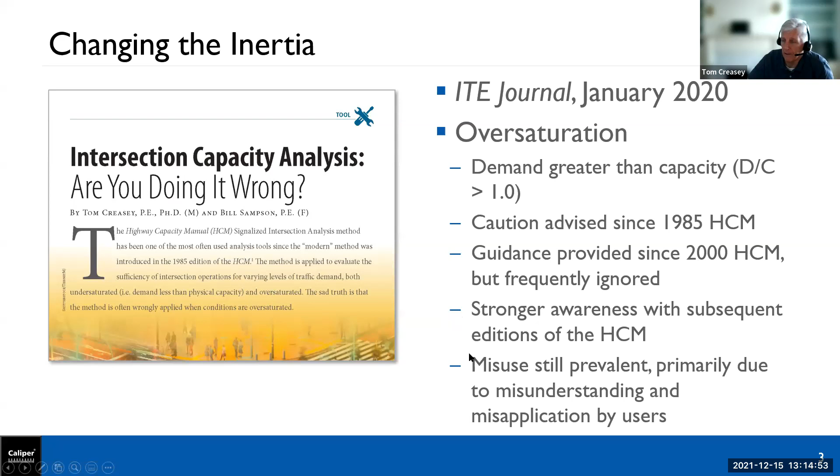And it's primarily due to misunderstanding by the users and/or misapplication of the methods, and simply just using software and not really understanding what the software does or does not do. So this is the article. You can actually look it up. It's the January 2020 edition of the ITE Journal.

So this group, dealing with simulation particularly, this entire slide should be familiar to you, but just quickly, the deterministic methods are not subject to randomness. This is what's in the HCM. They're macroscopic, so they deal with flow rate, that is vehicles per hour. No matter how many times you do the analysis, the same inputs are going to give you the same output. And two of the most prevalent, not the only two, but certainly Highway Capacity Software, HCS, and Synchro are the most commonly used tools. There are some others.

Stochastic is, these random variables are incorporated to represent attributes that we don't know with certainty. They behave within predicted ranges. And these are microscopic in that we model individual drivers that are following these rules of the road that just so happen to be defined by mathematical models. Rules for car following, lane changing, gap acceptance, those types of situations.

So therefore, we use random number sequences and perform multiple runs because, and we've all done this in collecting data, we may collect data during a typical day for several days in a row, and yet we're going to get different results every day.

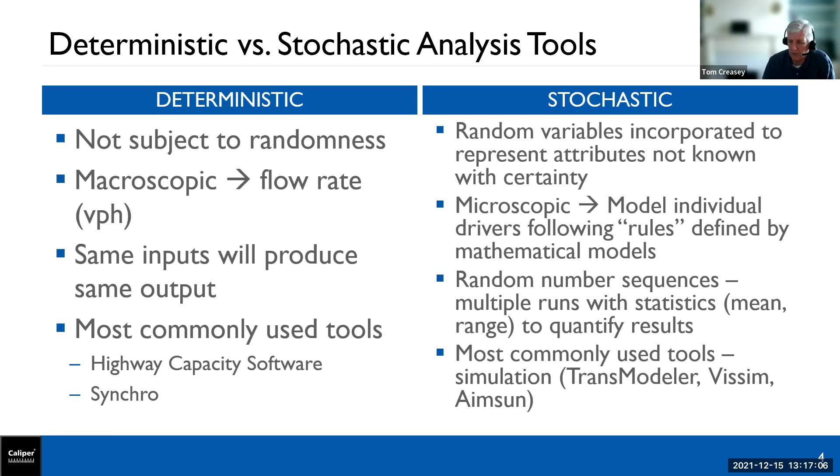There are a number of simulation tools that are out there. The most commonly used, I get to list TransModeler first because I work for Caliper, and that's our simulator. Vissim and Aimsun are also, as you all know, used quite frequently. There's some others. CORSIM is still around. There's SUMO, which is open source. Paramics was an early one back from the 1990s. Don't see it as much anymore, but there are a number of commonly used tools that do microsimulation.

Looking at the deterministic tools and the deterministic approach that was in the Highway Capacity Manual, most of the procedures in the HCM are based on a peak 15-minute rate of flow, which is then converted to an equivalent hourly flow rate using the peak hour factor. You can see the formula for that on the right-hand side.

A lot of people over the years have just not understood, though, that an HCM analysis is really analysis of the heaviest or the worst 15 minutes during the peak hour, the peak within the peak. And that's what the peak hour factor is for, to take that worst 15 minutes and equate it as if it were an hourly flow rate. So a peak hour factor range is somewhere between 0.25 and 1.0. You can do the math if you'd like, but the lower a peak hour factor is, the more peaked within the peak the traffic conditions are.

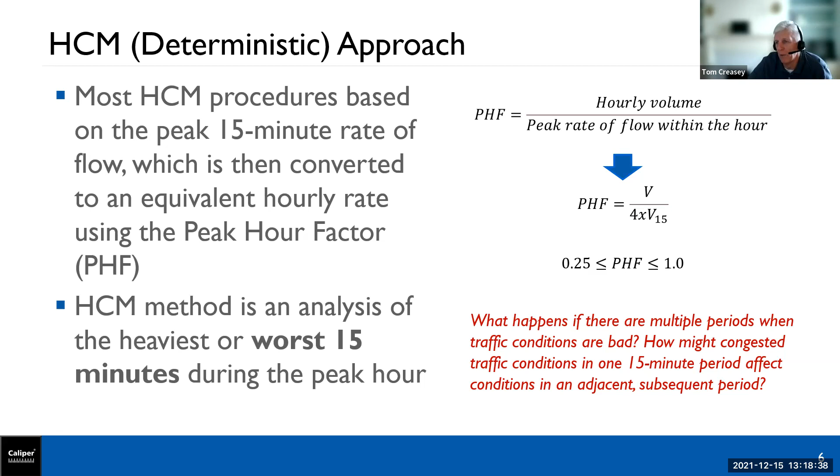But what happens if we have multiple periods when traffic conditions are bad? Maybe they're not all 4 periods within the peak hour, maybe there are 2 or 3. And how might congested traffic conditions in one 15-minute period affect the conditions in the next subsequent period, particularly when we're dealing with oversaturation? This is directly out of the HCM, and it discusses the three different approaches to looking at a single period of analysis versus multiple periods.

The one on the left, approach A, is really the default approach that the HCM takes, looking at the worst 15 minutes. And so this histogram is an hour divided into 4 15-minute periods. And we focus really on the worst of those. But because all of the volumes are in an hourly flow rate, we use the peak hour factor to basically make the entire hour the line even with the top of this one bar here.

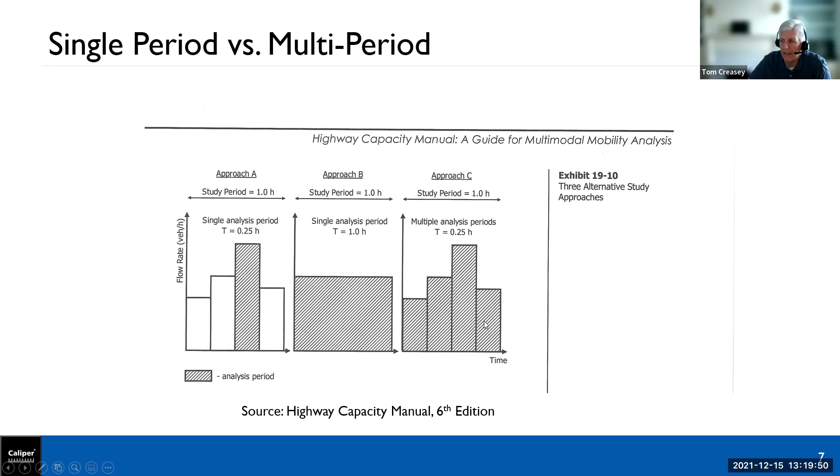When we look at a single analysis period, there's an implicit assumption that the traffic demand does not vary, that it stays constant over that entire hour, which unless we have really heavy traffic flow, we know is not the case. And then the third approach discussed in the HCM is to evaluate each one of these individual 15-minute periods.

So let's take a moment and look at the delay equation. Control delay is the service measure for the signalized intersections method in the HCM. The equation for control delay back in the 1985 version of the manual had two terms, a D1 term for uniform delay, D2 for incremental delay. The D1 term is the classic Webster delay diagram that shows the triangle, and the delay is the area under the triangle with the assumption that the arrival demand is uniform.

And then the incremental delay is this randomness that gets added to it, plus some additional delay due to cycle failures. We're beginning to at least acknowledge that oversaturation exists, but it's still limited. And in fact, that was the caveat to the method, that it really should be applied for D over C less than 1. And if it was oversaturated, then it just said, beware. It really didn't give you any guidance. Particularly back in 1985, microsimulation was just being discussed, and it was only done on mainframe computers. And we really didn't see anything that had animation to go with it.

Back then in the 85 version of the delay equation, the progression adjustment factor was applied to both of the terms. We had an update in 1994 and then a second one in 1997 that actually added this third term to the delay equation. Also, the progression adjustment factor was moved to be applied only to the first, the uniform delay term. But the D3 term was that residual demand delay to account for oversaturation queues. In other words, not all of the demand gets served. There's some residual queue that gets left over.

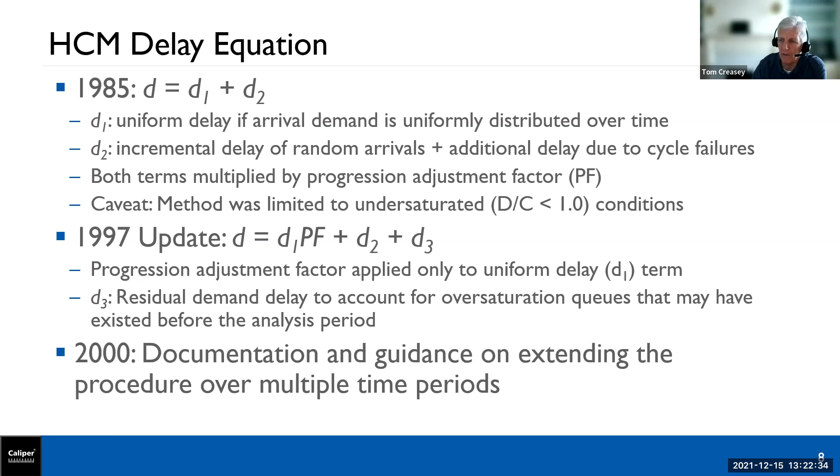The guidance in the HCM though, and it's very clear today: if the analysis period's demand volume exceeds capacity, then a multiple time period analysis should be undertaken when the study period includes an initial analysis period with no initial queue, and a final period with no residual queue. So you start the analysis before there's a queue, you end it when there is no queue. So you contain the analysis in time so that the oversaturation is contained within your analysis period.

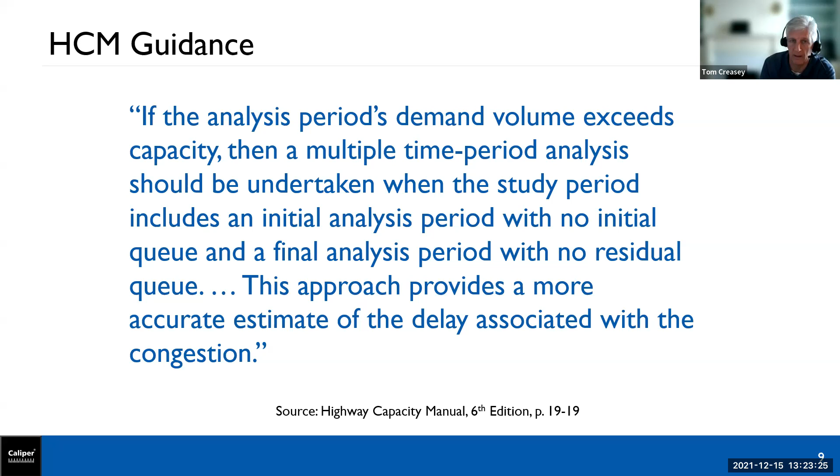This approach provides a more accurate estimate of the delay associated with the congestion. That is there in print at the bottom of page 19-19 in the current version of the HCM, which is the 6th edition. So why is this important? And I'm going to show you in a minute. For oversaturated conditions, a single period analysis using a peak hour factor will underestimate delay, and possibly significantly.

Now remember, this is the default approach. This is collect hourly volumes and compute the peak hour factor. It depends on the software tool that you're using, but if you don't select multi-period, this is going to be the default. I know it's that way in the HCS.

And also this is important because it can result in signal timing with shorter cycle lengths and phase times that don't process the actual demand, especially if you're doing an optimization that is delay based. If you are underestimating the delay, then how do you know if you're going to have an optimal cycle length and optimal timing plan? It could also cause problems with inadequate turn bay lengths due to underestimation of queues.

So the deterministic methods from the HCM, implemented in HCS and Synchro, when you have oversaturation in a turn lane, simply raise a red flag, but don't do anything to account for when that queue backs up into the adjacent main through lane. It just puts a red flag up. Well, if you've been doing simulation work, which I assume most if not all of you do quite a bit, you'll see that that actually does make a difference. It affects the flow rate of those through lanes. The deterministic methods don't account for that queue spillback into the through lanes.

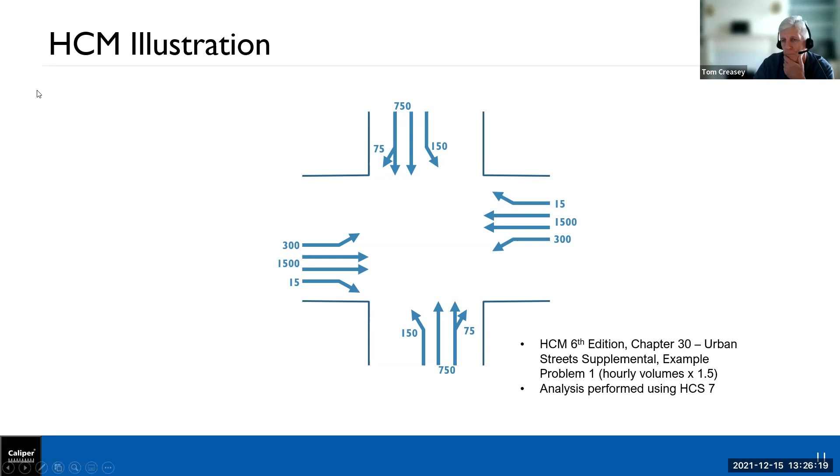One thing we did is we took the hourly volumes there and inflated them by 50% to make sure that we would be oversaturated. And then we just used the Highway Capacity Software to do the analysis. Just want to focus on this eastbound approach and these two movements, the eastbound left turn and the eastbound through movement. The 2 lanes with 1,500 vehicles per hour are the through movement, and a single left turn lane has a demand volume of 300. The difference is that the left turn movement is undersaturated. The through movement is oversaturated for these conditions, which include the signal timing parameters.

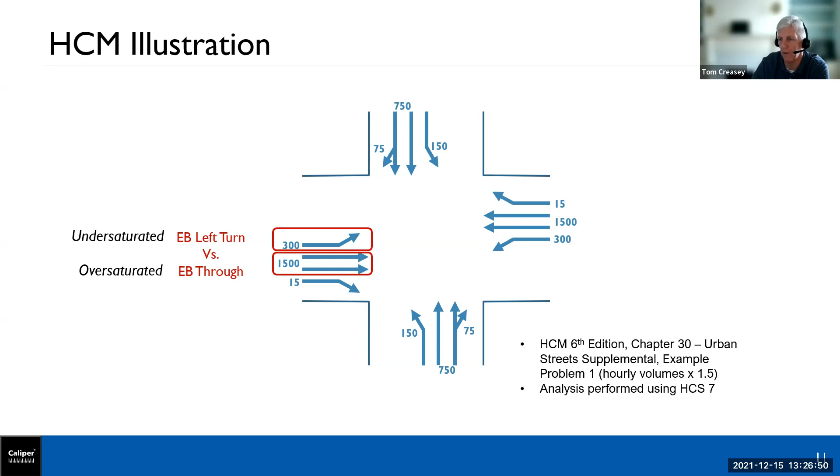When we look at the eastbound left turn, which is undersaturated, so this first row in the table, it's got a volume to capacity or demand to capacity ratio less than 1. It's close to saturation, but not quite. Using HCS to compute the control delay, and for whatever reason, there's a little bit of rounding difference in the software or something. It's not exactly the same, but it's virtually the same. We're essentially getting the same answer, whether we do a single period with a peak hour factor or do a multi-period because it's undersaturated.

We get a different story here for the eastbound through lane, where we have a demand to capacity ratio of about 1.2, 1.3. So the first column is doing it as a single period analysis, and then doing it within HCS as a multi-period analysis. You can see that the differences in the delay values, particularly by the time you get to the end of time period 4, is greatly different than if you only did a single period analysis. 5, 6 times the delay if you do a multi-period.

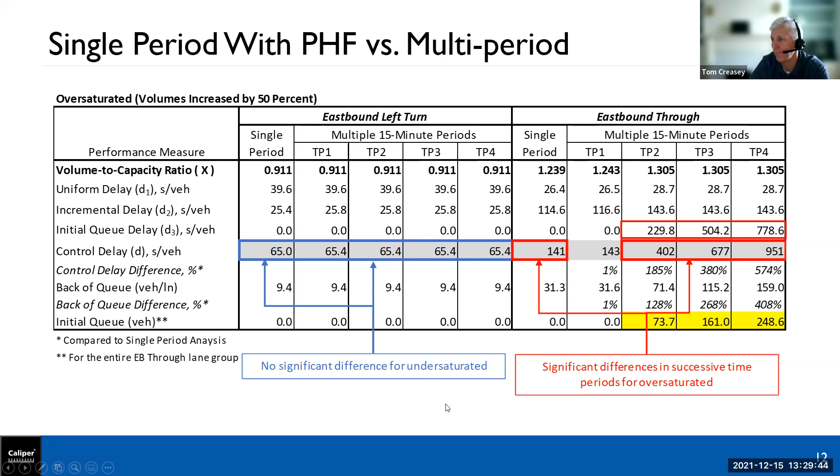The last time I used Synchro, and I know that Synchro is very popular, and I use Synchro 10, I haven't used 11, it did not do a multi-period analysis. It only did single period. I don't know if that's changed in Synchro 11, but it certainly was not there in 10. And of course, this is the implementation of the HCM methodology. So they're both software tools, but this illustrates that when you're in oversaturation, you get a big difference in single period versus multi-period if you use a deterministic approach.

Now, let's look at doing it in microsimulation. Of course, because this is SimCap and everybody's familiar with simulation, this is familiar stuff for you. You understand that vehicles enter the network at entry and exit points, and depending on the tool, there's a warm-up period that's required to preload the network. And these vehicles waiting to enter the network are kind of stacked invisibly outside.

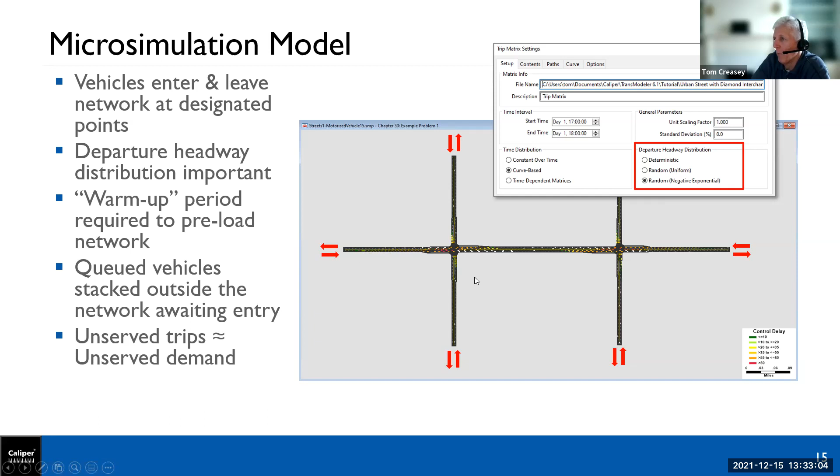So wherever your network boundaries are, you need to be careful about what is close by and make sure, to the extent that you can, that the entry of vehicles into the network at that point is not affected by something upstream like a closely spaced intersection. You may need to include that in your analysis and move even farther upstream just so that you can incorporate those arrival impacts correctly in your simulation model.

Some simulators will allow you to customize your demand profile so that you can make it mimic what might be in counts, for example, where you might have a peak within the peak.

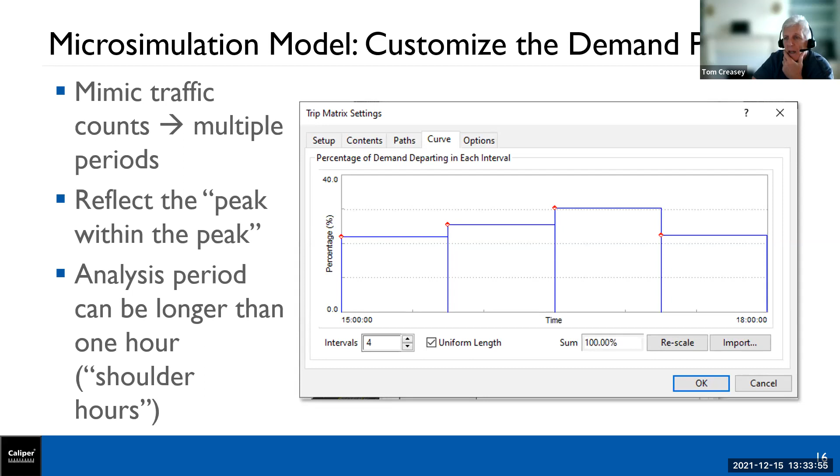And simulation models also allow you to have an analysis period that's longer than an hour. So when we get into metropolitan areas, we typically have a peak period of 2 or 3 or even 4 hours, depending on which metropolitan area you're in. So be aware of that, and just make sure whatever tool that you use, that you're aware of your ability to customize your demand to be truly reflective of what is out there on the street.

Of course, the model calibration and validation are extremely important. Again, both in time and in space, we need to get beyond the oversaturated regimes in the beginning and the end, so that you can accurately capture the effects of oversaturation. And remember that there's a difference between traffic demand and traffic counts. And I've got something real quick here in a minute to illustrate that.

But I think within the profession, we've done a better job of calling it out now, that when you're oversaturated and you are doing intersection counts, you're not measuring demand, you're basically counting saturation flow rate. So other means must be taken to get an accurate estimate of travel demand. And in calibrating your model, things like queue lengths and travel speeds are all affected as well.

Using microsimulation software, be aware of the differences between the headway buffer that's used, which is akin to the saturation flow rate that you're going to have in the deterministic tools like HCS and Synchro. Big thing is when you have actuated signals. And I have to confess that it took me a while to finally understand this.

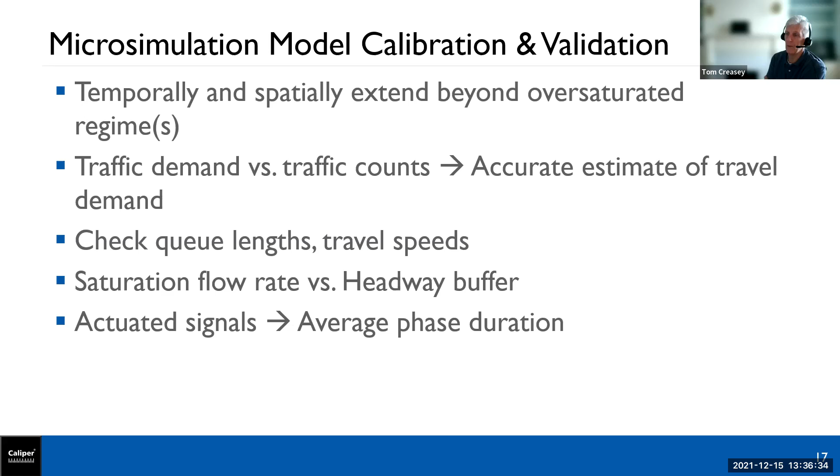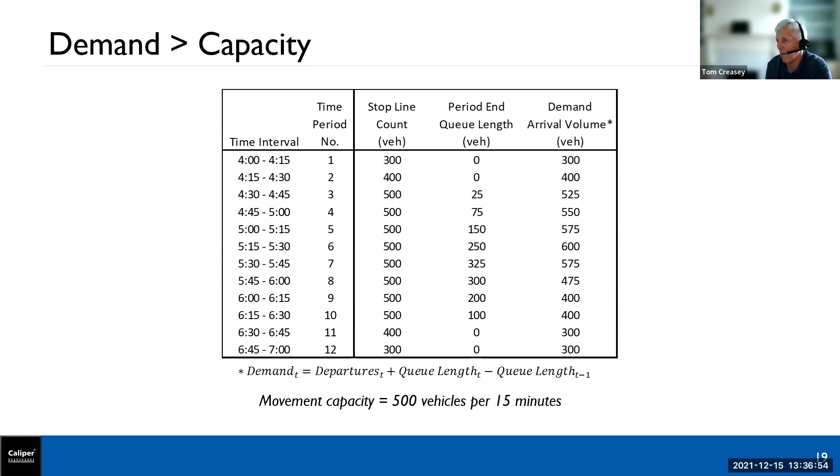So the deterministic tools have a phase duration model, which takes that actuated signal and approximates it as though it were pre-timed. You need to just understand what's going on with that. And then just briefly, I talked about demand versus counts. This is just a simple queuing analysis where the demand from one time period is the departures plus those that are in the queue, minus what were in the queue from the previous time period.

And it just illustrates, when you put this in a graphic form, that while the demand may increase at some point, you want to make sure that you can incorporate your analysis to include this entire profile, so that there are some parts of it where, when the demand is greater than capacity, they're going to continue to stack up. At some point, the demand will be less, but you'll still have a residual queue carried over.

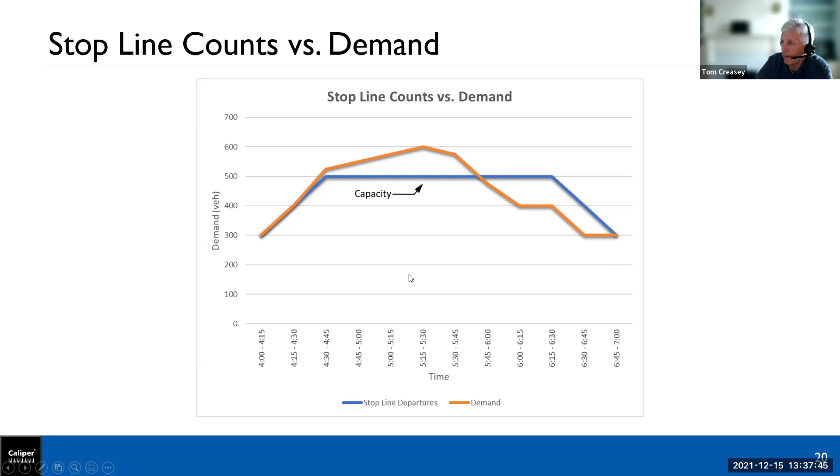So this illustrates that if you are counting at the stop line, from one 15-minute period to the next, when you're over capacity, you're going to get similar numbers until you finally get out to the point where you're getting rid of this residual queue that's backed up. So again, just points to remember on that.

This is a good illustration of when your conditions are oversaturated and where your stop line counts don't equal the demand. So it may be necessary to move upstream to the back of your queue and provide a second count location. At the stop bar, you do need the distribution of turning movements. So it's important to do that, but you may need to come upstream at a second location. Now I know that we were providing some guidance.

We actually helped author a manual that was implemented by the Ohio Department of Transportation. And it was both on using simulation and on using HCM methods as implemented through HCS. And we had a whole lot of discussion about traffic counts over multiple time periods, 15-minute periods, but for multiple hours, and upstream count locations, and doing it the right way.

I would just say that there was a lot of discussion about concern about driving up the cost of a project with data collection. And I understand that, I certainly do. But the other question is, it's important to get it right. Do you want to know the right answer? So, maybe you've had some similar discussions with clients in your region, but a lot of debate about that.

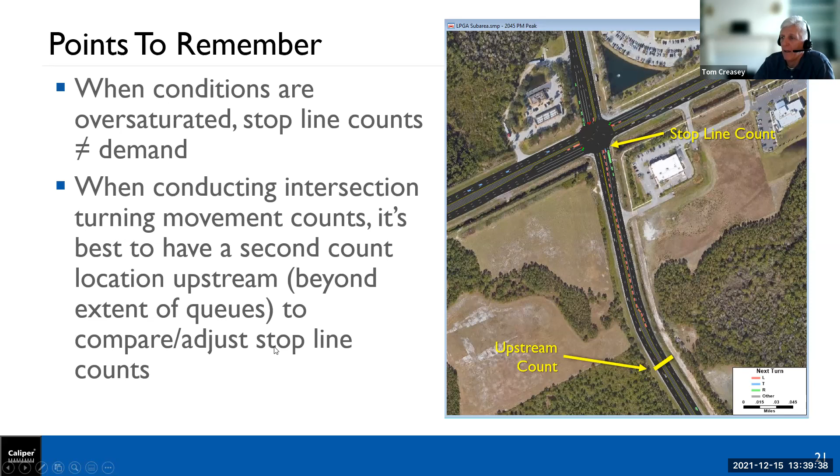So again, particularly where you have an approach that's oversaturated, it's always a good plan to go upstream from that, away from the end of the queue, to get a second count, and maybe using that adjust what happens at the stop bar.

In simulation, my experience as a practitioner has been, depending on the software tool, if you can use an origin destination matrix, it's usually better for dealing with oversaturated demand than if you use intersection turning movement counts. Our software will allow you to do both, even in a multi-period format. Given one versus the other, I think OD matrices are a little better. I won't get into the details of why, but there's more flexibility, and particularly as a practitioner, when you are considering design alternatives, a lot of times it's easier to maintain your quantified demand in an OD matrix.

And even if you are undersaturated, particularly if you're getting close to saturation, using a deterministic analysis, it's never a bad idea to do a multi-period analysis. Maybe you want to do an initial check to see how close to capacity you are. Of course, as practitioners, most of the time we wouldn't be doing a study unless we were getting close to capacity, if not over. So something to consider.

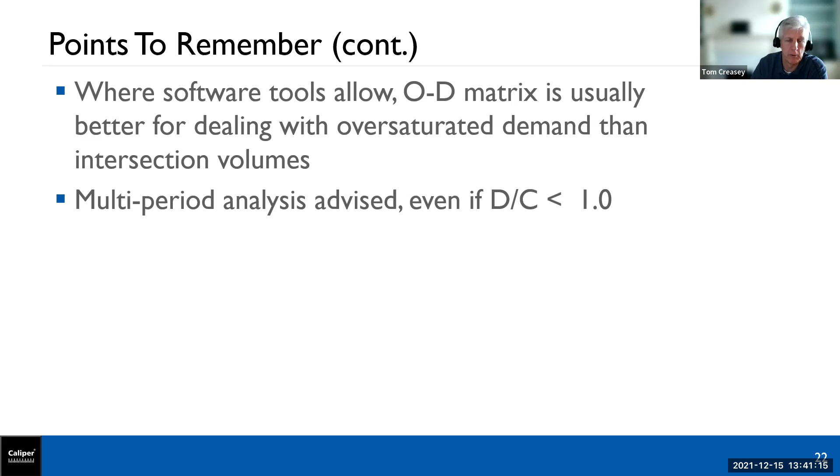But particularly, let's say that you're using HCS, it's just a little bit more effort to set it up. But in the end, HCS will automatically compute that incremental demand as part of the D3 term of the delay equation. So there's a good reason for doing it that way.

Final thoughts. Tools are just that, they're tools. As the analyst, you're responsible for applying them properly and coming up with the right answer. But select the right tools for the right reason. I've heard "because it's easy to use" way too many times, to the point that it's sometimes been really frustrating to me, because people are selecting them and getting the wrong answer.

Know how your tools behave, particularly the assumptions that go into their use and their limitations. All analytical methods have assumptions and limitations. All software tools have assumptions and limitations. Know what they are. And remember that decisions on how an agency is going to spend millions of dollars on infrastructure improvements might be riding on your analysis. So don't take it for granted. Some very important decisions are going to be made, and please keep that in mind.